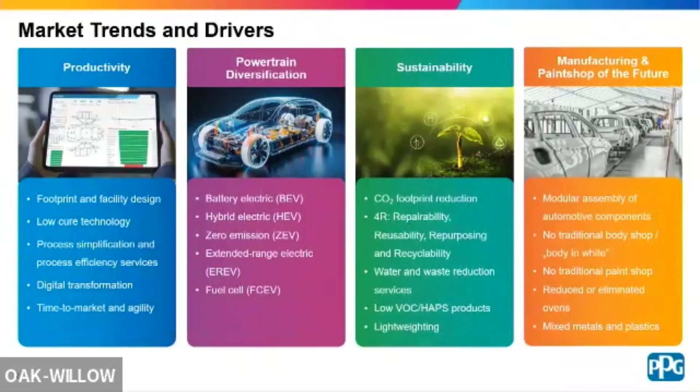So in terms of our sustainability targets, we're just going to touch on a couple of these as they relate to my work and Lindy's work. The big one being 50% reduction in Scope 1 and 2, 100% reuse, recycle, and recover. Again, Ecoat, you can recover most of it, almost 100% really. 5% annual reduction in spill release. This is a big one for everybody.

Reduced water. So we, just like all of our competitors and even our Chinese OEM competitors, reduced water is a huge ask. And we have a lot of people who spend a lot of time just looking at the math of that. What does that mean? What does it mean to us? What does it mean to our customer? What does it mean to the end user? And we'll touch on that a little bit today too.

And then one of our big ones that we're always committed to is our 15 million in giving back to communities, as well as our sustainability, which is not just Pittsburgh or Detroit, but also our communities where our sites are.

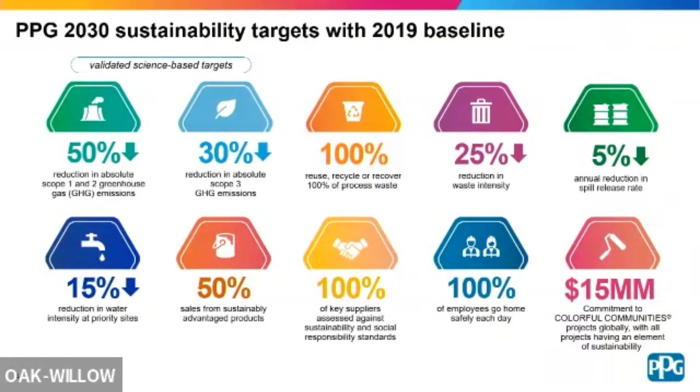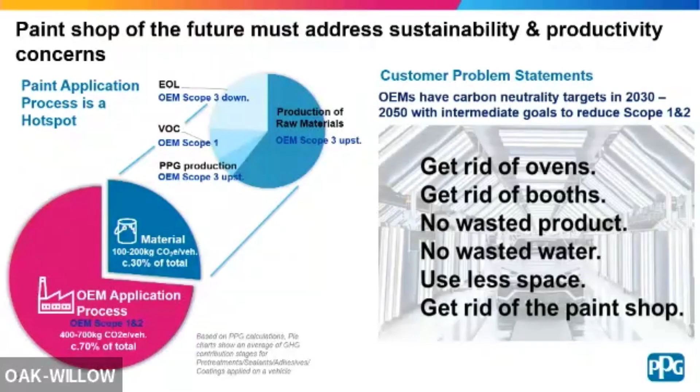So the paint shop and how it relates to Scope 1, 2, and 3. So what PPG did is they said, okay, let's assume 70% of our Scope 1, 2, and 3 comes from the application and 30% comes from the materials. Where I sit in the PPG value chain, I focus on the materials. So how can I get that 30% reduced? Where does that reduction come from? How do we measure that reduction? And how does the end consumer, OEMs, look at that reduction in their technology? So that's what we're going to kind of talk about today.

So I'm going to cover the Ecoat section. Lindy's going to cover ANS. So in Ecoat, we're basically going to take a technology walk. We're going to talk about how we had to re-engineer our approach, which then requires a re-engineering of the product, which requires re-engineering of the resin. And then we're going to talk about how we move through the value chain of getting the benefit out of the re-engineered process.

So in terms of low temperature expanded bake Ecoat, where it stands in the can, it still has to be an Ecoat, okay? High edge, good throw, good corrosion, pretty indestructible. You can put anything on it. You aren't going to lose adhesion. It has to do what it's always been, but it has to do it better, more efficient, using less water, higher solids, and everything that goes along with that.

And then the value outside the can, this is where you're going to reduce your energy consumption, you're going to reduce your emissions, you're going to reduce water usage, and we want faster cure. And we'll kind of talk about the math because we are going to include the math in that, where faster cure means different things to different OEMs.

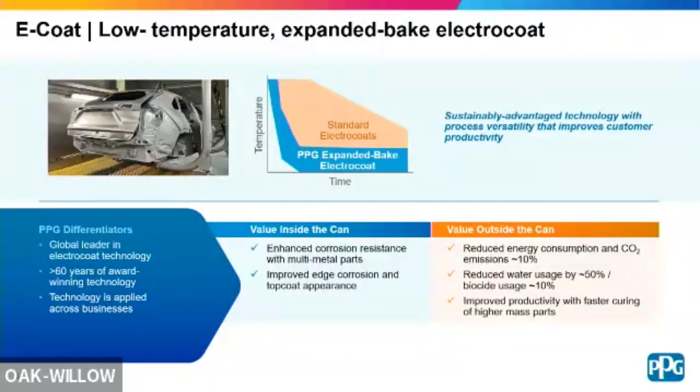So the product - basically, we took a technology and said, okay, it's a great technology, people love it, but we have to make it more sustainable. And because sustainability means different things to different people, we basically have to start from a base. We want that base to function with the best efficiency we can get, and then we can start delivering additive packages to specific OEMs that have a higher standard. But we want this base to be more sustainable than anything we've ever done.

So we have to give it an expanded bake window. We have to look at low consumption of solids per vehicle. We have to look at no tin. We have to look at compact process and thin film pretreatment. We have to look at appearance, because PPG always prides ourselves on Ecoat appearance. And then we don't want to add CapEx. We don't want to slow down your line. We want to give you the ability to speed up your line so you can put more parts on, and reduce biocide usage - nobody likes adding biocide to a tank.

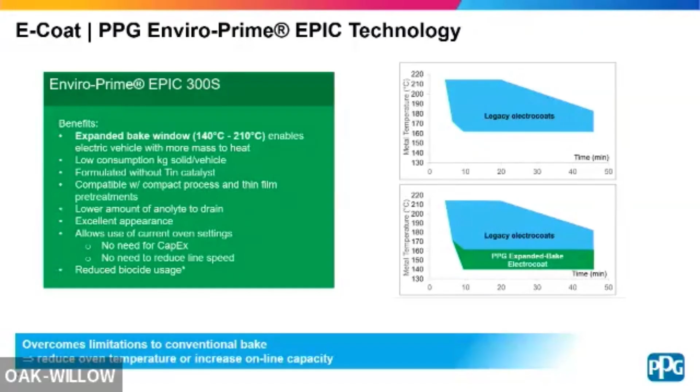So from the beginning, we have to re-engineer a resin. In a typical Ecoat formulation, you basically have a droplet - it hits the panel, it flows, it goes to the bake oven, and you start the cross-linking process. You cannot start the cross-linking process before you've optimized your flow, because if you do, you don't have edge or pinhole coverage, and there's a slew of other things you just won't get.

So you're on a seesaw, right? If you're a formulator - we both started in the lab - you have to get off the seesaw. So how do we do that? We basically changed how the resin is going to deposit on the film. We don't want a droplet and then it flows - we want the resin to hit the panel and start flowing, because you're reducing your bake window. You're reducing your bake temperature, which means you're going to start curing this thing a lot faster. So that's pretty much how we address this from the beginning.

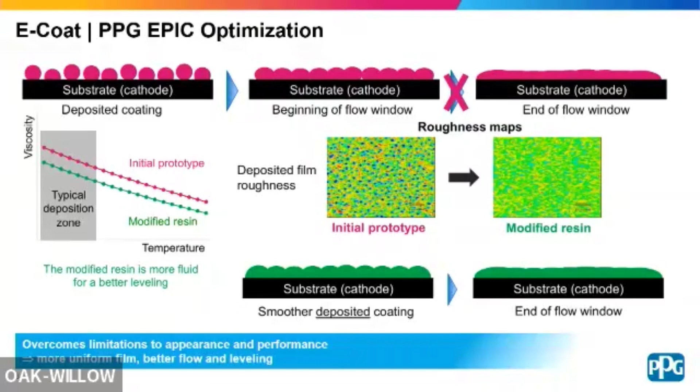Here you can see a traditional or initial prototype of where we kind of started with this, and you're looking at the roughness, where we didn't achieve the flow we wanted before it started to cross-link. So we had to make some changes, and you can see here with our modified resin, you're able to do that. So now you have a flowable material that'll cure when you want it to cure, and you'll be able to get the performance that you want.

So what comes next? Your curing mechanism. To do this, we have to start looking at blocking agents - how they're blocked, when they're released, what temperature they're going to be released at, and then how do they orient themselves quickly. So once you're able to optimize your cross-linker to your polymer, you're able to do your cure test.

Now, because we all started in the lab, the easiest way to do this is just solvent rubs - you just sit there and rub it, and you're like, hey, I've got the cure that I want. But the more scientific way to do it, and to really understand that the resin is doing what you want it to do, we look at rheology and we look at TGA. In terms of rheology, how does it flow? And we always want to make sure we're maintaining rheology, because our customers don't like when you start messing around with that.

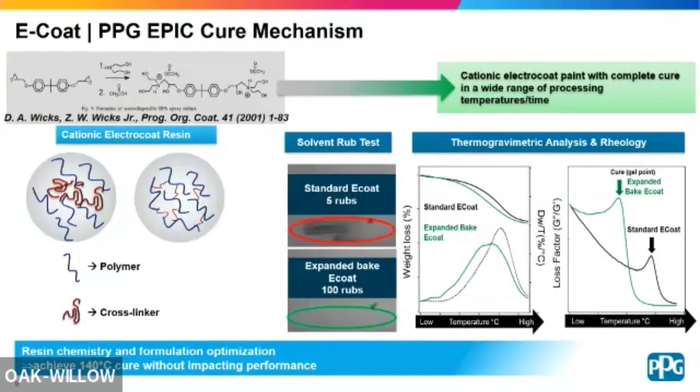That's basic - so how do you achieve the same rheology but changing your bake profile? Here you can see on TGA that your bake is staying pretty much the same, but at a lower temperature, you can achieve the gel content or the gel rating that you need. So therefore, you're curing this a lot quicker and at a lot lower temperature.

So what's the benefit to the customer? You get a whole slew of things: reduced biocide, you can reduce sanding which affects bullseye, reduced water, reduced cleaning, your oven filter changes can be less frequent, and no CapEx. And we don't want to slow down your line - we want to help you speed it up.

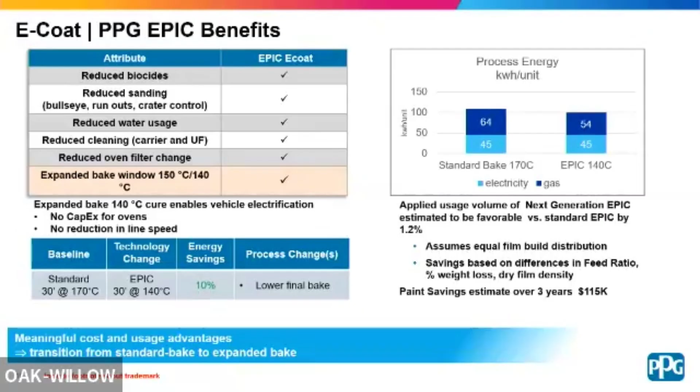Now, there's not a one-solve solution for everything, and everybody knows it - if you work in production, you know it. So in terms of electric ovens, you're pretty much not going to notice a difference. You'll notice the difference in a gas oven. But what people really care about is the math.

So we take a gas oven and we lower the temperature 15 degrees - you'll achieve a reduction of 11%. However, if you reduce your oven time by 5 minutes instead and keep your oven temperature the same, you can get a 13% efficiency. So this becomes really critical to parts, and it's why parts and tiers love this type of technology, because they can just load the line more and fill the line. And you can even do this with big parts at your IC, right? So your industrial, your cabs, your John Deeres - they do the same thing.

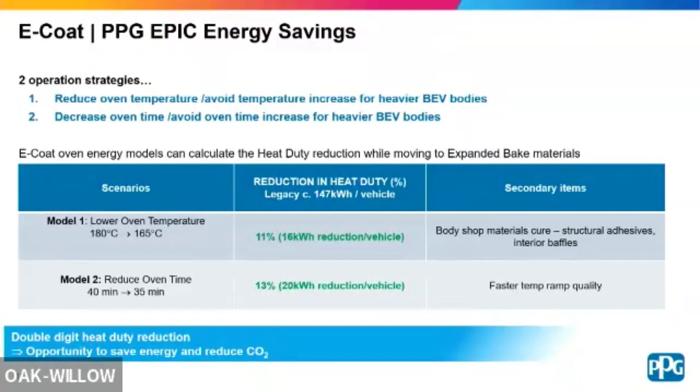Now we can move to compact process, because this technology fits really well into compact process. If you're familiar with zinc phosphates, it's an old technology, but it's a workhorse technology. And if you know zinc phosphate, people love it. But it takes a lot of tanks and a lot of dips.

So about 5 years ago, everybody went to Zircobond, which is like a thin film pretreatment. A lot less tanks, a lot less dips. But the big thing, again, is going back to scope 1 and scope 2. How do we reduce our carbon footprint? Compact process lets us shrink tanks and shrink dips. So it's all part of this system to help everybody achieve what they want while costing less and not causing too much chaos in production.

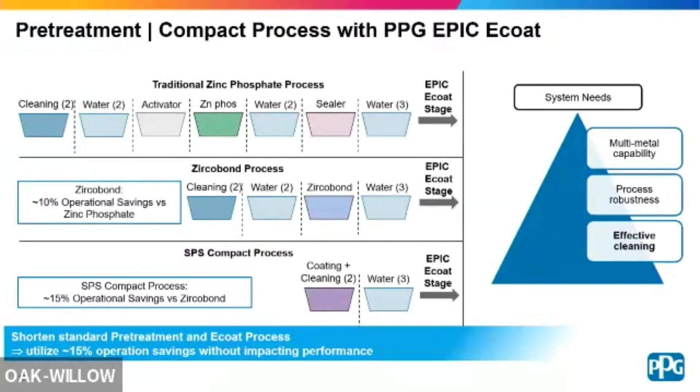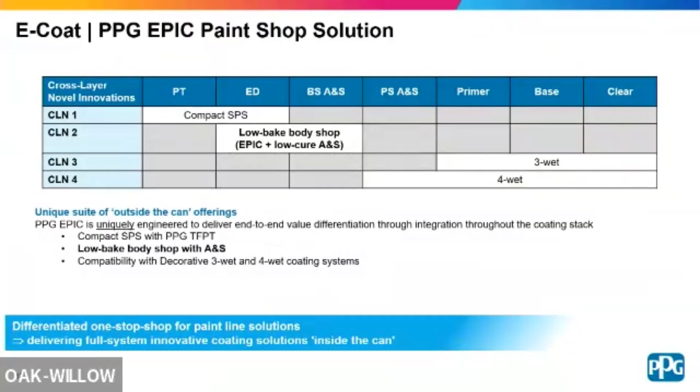So in terms of the paint shop's solution, we've covered compact process. Lindy's going to talk about the low bake body shop options for A&S. And then we have the commercially available 3-wet and 4-wet processes. Our colleagues are going to do an amazing job of talking about their low temperature cure alternatives to these products later today. And I'm going to turn it over to Lindy.

Let me shut this off really quick. How do you turn this? Changes, just click that way. Oh, that's easy enough. Okay, can you guys hear me? Okay, yeah, I sound very loud.

That's good, thanks so much, Paula. So I wanted to talk a little bit today about the work that we've been doing in the adhesive and sealant space, partnering with our Ecoat team to make sure that we can also get that expanded bake cure as well as maintain some of the other performance properties you would want from an A&S portfolio.

I think as all of us are aware, there's a lot more that cures in that Ecoat oven than just the Ecoat, right? There's also the adhesives and sealants that go along, as well as some other components of the car. So here at PPG, we wanted to make sure we were developing a broader portfolio of products so you could really enable those productivity and cost savings.

Within the body shop itself, there's a wide number of adhesives and sealants that are applied before the Ecoat process. Anti-flutter technologies to help with panel vibration for some of those outer panels, structural and semi-structural adhesives, things like that. We have current product lines today, CORASEAL, CORABOND technologies, but we needed to make sure we were adapting our portfolio and innovating to keep up with these new market requirements and market trends.

The higher productivity, the lower bake temperatures that Paula mentioned. We're also seeing some needs for increased manufacturing flexibility. As we're starting to see new substrates come online, heavier metal segments especially for electric vehicles, there's new substrates we need to make sure we have adhesion to, but then also we're seeing some more variable manufacturing tolerances. What I mean by that is that bond line thicknesses are changing, or we're being asked if we can apply things thicker and still maintain the same performance, for example.

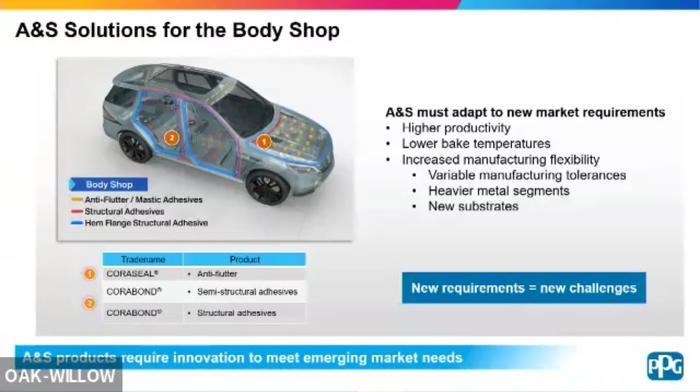So I will start talking with our structural adhesives, and then I'll move on to our anti-flutter sealer developments towards the end here. On the structural adhesive side, we do have an expanded bake portfolio now. Actually, a PPG colleague of mine did talk a little bit about our structural adhesive development work at this conference a couple years ago. I just wanted to expand upon that, how we've broadened that platform since then, and also moved on to anti-flutters and sealers as well in this space.

So for the structural adhesives, this is going to be a 1K epoxy platform, really tailored to meet different strength requirements depending on where it's being applied within your vehicle. So a rigid, a crash, or a high crash adhesive, all of those are commercially available. And there were a couple key technical innovations that were required, key focus areas for our team to enable this platform. The first being reactivity, and then moisture resistance.

On the reactivity side, that's really targeting that low temperature cure. So you need to have a more reactive system in order to get cure at 140 C, 10-minute bake times, if that's your minimum cure target. And you can achieve that with different accelerator packages, right? However, what we found was once you do that, you get a more reactive product, but you actually lose shelf stability. So that's not ideal. The team has spent a lot of time working on optimizing that accelerator package so you can achieve that low temperature cure while maintaining the long-term shelf stability that you would need.

So here I'm just showing a basic graph, a DSC graph showing heat flow versus time. You're really just seeing you can change your accelerator, tune that reactivity, or find a balance of reactivity so you can enable those two different properties.

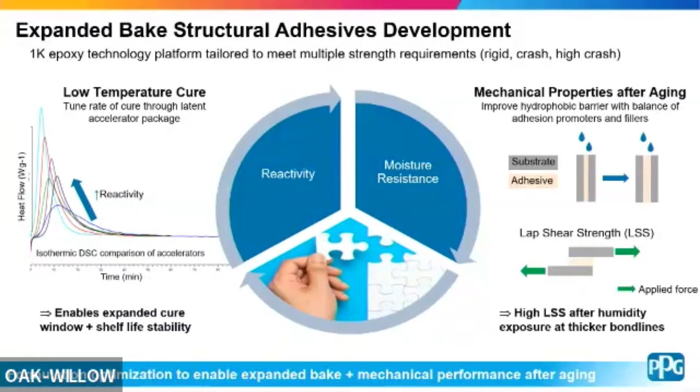This is our crash adhesive, showing some of the storage stability that's been achieved. We have accelerated aging, tracking viscosity over days of storage at high temperature, in this case 35C. The orange curve shows a big viscosity climb pretty quickly at high temperature, which isn't what you want. We were able to formulate around that to bring it down closer to the green line, where you have a really good stable viscosity over time.

Of course, you want to translate that to real life conditions, more like room temperature storage. We measured viscosity versus shear rate at 1 week, 6 months, and 9-month room temperature storage of the material. You see very similar behavior between all three time points, that really nice shear thinning behavior, with very minimal increase in adhesive viscosity over the course of 9 months. So we were able to achieve both heat age and long-term shelf stability for this product.

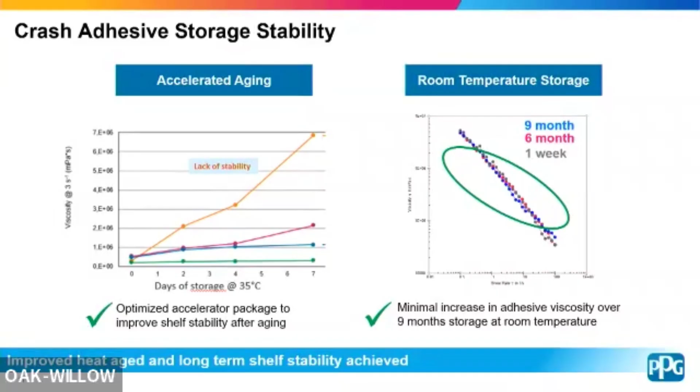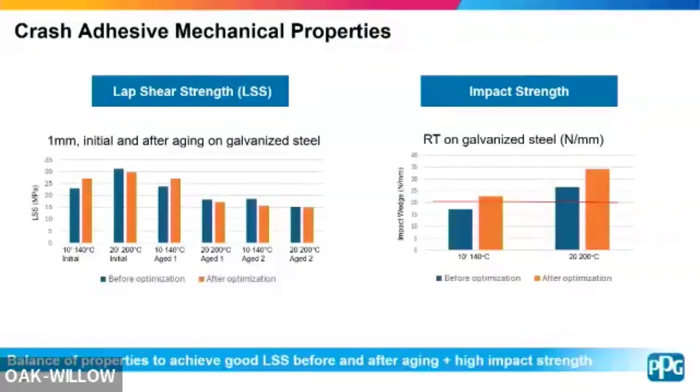While doing all that work balancing properties in the lap shear strength, we also wanted to make sure we weren't affecting the impact strength, which is very important for crash performance. This is a typical impact wedge test, shown on the right. Before and after optimization, we were actually able to improve the impact strength as well, so we were not negatively impacting that performance.

Okay, this is a summary of where we are today with our expanded bake platform. So again, 1K epoxies, we have a range of different adhesives. We have a high crash, a crash, and with a hem flange capability as well as a rigid. You can see the step down in strengths that you can get depending on the specific requirements.

For the high crash, just wanted to call out, we've spent a lot of time innovating around that frozen state impact resistance, so at negative 40C, making sure you get above 15 newtons per millimeter strength there. All of these products would have that 140C cure in 10 minutes, minimum bake, with long-term storage stability.

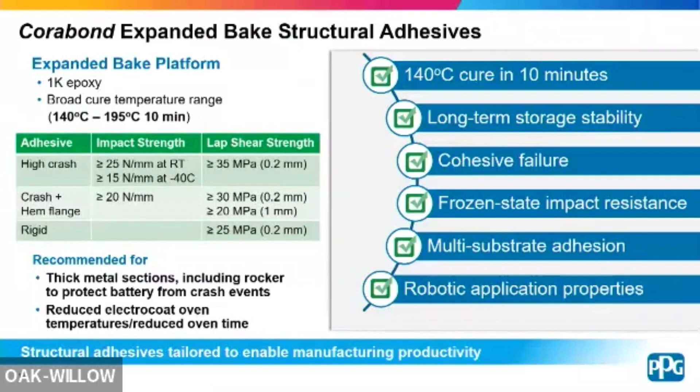Okay, so that's on the structural adhesives, and then I want to talk a little bit about anti-flutters and sealers as well. So we do have a technology platform for anti-flutters and sealers that's rubber-based. It has variable elongation and expansion depending on the specific needs.

The two major focus areas for the technical team for this development was on the stability, which is obviously related to the reactivity we saw with structural adhesives as well, and then elongation.

On the stability side, we have to enable that low temperature cure, right? So thinking about tuning that accelerator package like I mentioned before, while maintaining that shelf stability. You also need to think about process stability, so that formulation robustness. We really need to optimize the binders as well to make sure we get good process stability throughout that cure.

Window formulations throughout that cure window, and then over time as well. And that just comes down to, in a lot of ways, binder molecular weight. So can we tune different binder molecular weights to achieve that kind of stability that we need?

On the elongation side, thinking about flexibility and ductility, how do we adjust that depending on the specific need, the location of where it's going to be applied on the vehicle, if we need more of a sealing functionality versus a high elongation functionality or a gap filling functionality.

And really you can achieve that by adjusting the polymer microstructure. So just showing a very basic chemical structure here, but you get the idea, where we can adjust that microstructure to tune that elongation. And we're primarily measuring that using a standard tensile test with those dog bones, where you pull them apart until they break.

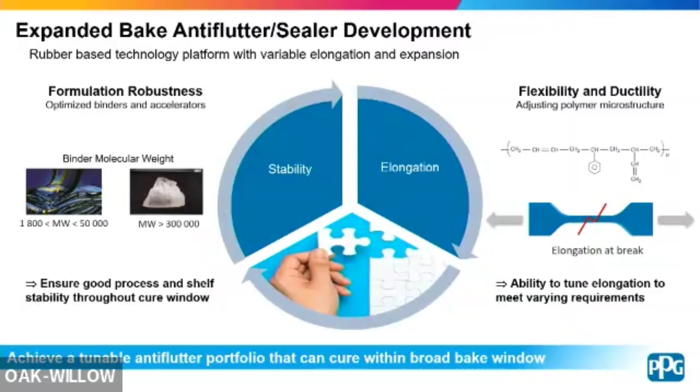So just to show a snapshot of some of the mechanical properties of these anti-flutter technologies: pressure versus flow. This is a graph showing pressure versus flow for our standard bake formulations, as well as this expanded or low bake technology formulation space at both 2 weeks and 6 months. And you can see that the performance is very similar for pressure versus flow.

And that's very important for anti-flutters, especially when you need to have very consistent and tunable shape stability. So you have a very specific diameter and height of your droplets that you might be wanting to apply, making sure that's very consistent over time. And so we're able to achieve that.

And then on the elongation side, this is again that tensile test I mentioned, so we're showing strength versus elongation percent. You can see our initial formulations, we were maybe in the 20% elongation range, able to tune that up to 80 to 100% elongation, depending on the specific technology. So we were able to get that improved elongation, but while maintaining that good process stability as well.

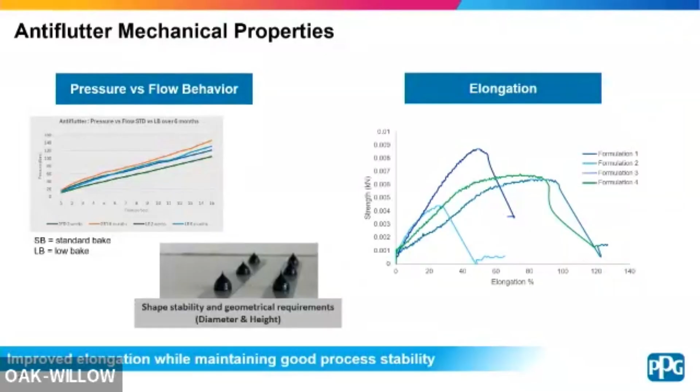So just to summarize, we do have a full expanded bake portfolio now, so Corabond structural adhesives, semi-structural hem flange, as well as our Coraseal anti-flutters and sealers, all of which can achieve that expanded bake window with that minimum 140C cure in 10 minutes and 6-month storage stability.

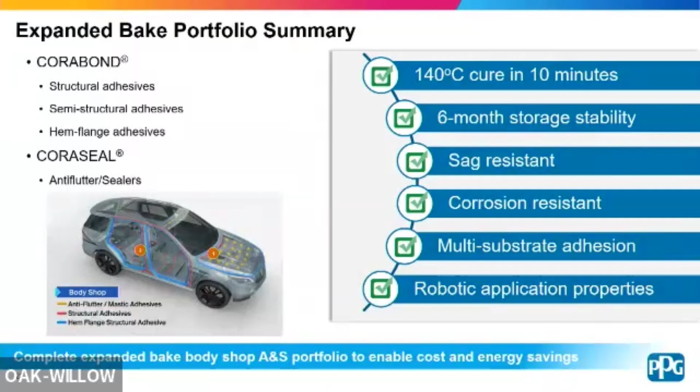And some other properties I didn't go into detail today, but that obviously are important too, would be sag resistance, corrosion resistance, multi-substrate adhesion, and then robotic application. So all of these products partner well with our new Ecoat developments to help enable those cost and energy savings that Paula mentioned in her part of the talk.

Okay, so I just wanted to wrap up, summarizing. Paula introduced all these market trends and drivers that we're looking at and developing around, and I think our Ecoat and A&S expanded bake solutions really tie into a lot of those today: productivity, powertrain diversification, sustainability.

But I wanted to also tease kind of what's next. So thinking about that paint shop of the future, all the buzzwords: modular assembly, mega casting, giga casting, et cetera, making sure that we're positioning our portfolio to help enable those newer manufacturing processes. So we are looking at new solutions there. We have a variety of ambient cure adhesives and sealants, some of which are commercially available, some of which are under development, that I wanted to just mention.

Again, within our Corabond structural adhesive product line, thinking about maintaining impact and shear strength that you would need with that ambient cure. And then we have a Coraseal structural sealer that we are working on, which would be balancing strength and elongation, so high strength and high elongation. Happy to talk more about that offline if that's of interest, but wanted to throw that out there.

And then on this more substrate protection side, we do have a new aluminum pretreatment line that's specifically designed to improve efficiency within the aluminum pretreatment space. As we're starting to see more aluminum parts come online for lightweighting and other things, we have a product line that can help enable that as well, predominantly for our tier segment.